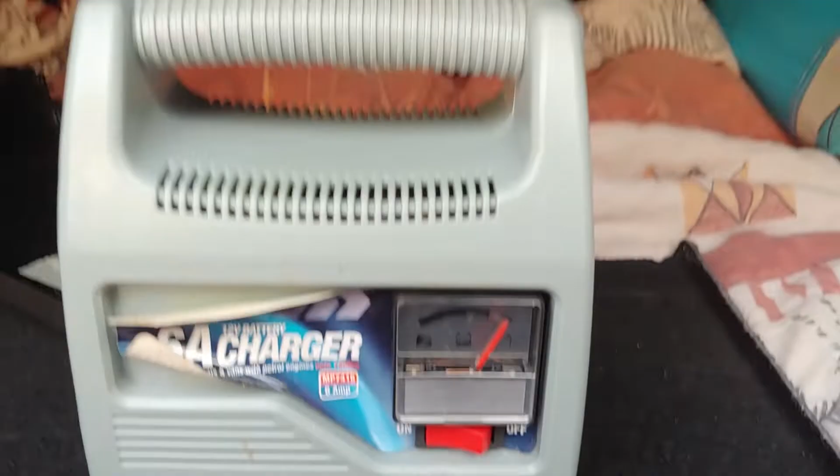Okay, connect my car to the charger. I recommend using this charger, despite it saying it's 6 amperes, it never gives you 6 amperes, probably 4 maximum, so it never overcharges your battery. I recommend using the cheap one, no smart chargers please, otherwise you can easily damage your electric system. This one is quite simple, it's just 4 diodes here and a transformer, which basically means the more your battery is charging, the less amperage is coming in, so I recommend using this one or similar.

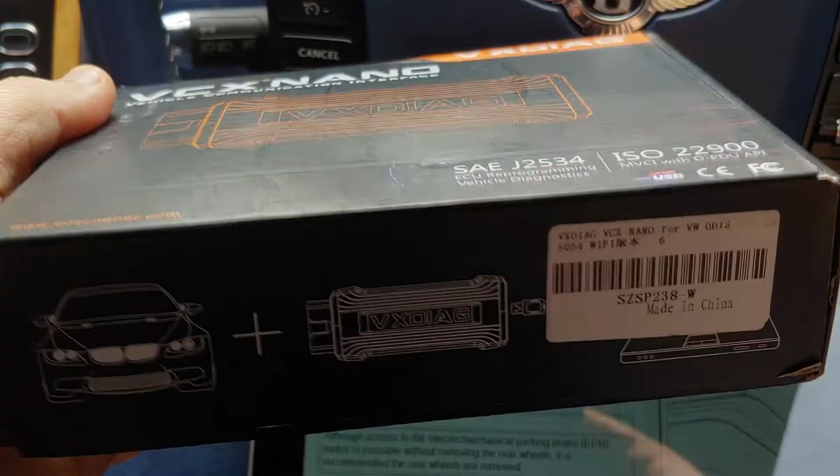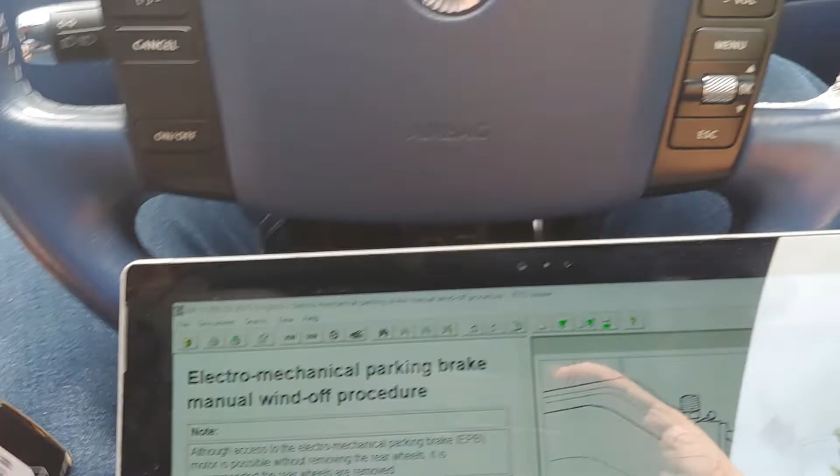Okay, this is my diagnostic tool I'm going to use. It's quite good, I use it quite often. It does everything from programming your car up to resetting all codes and doing any checkings necessary for Bentley, and not just Bentley, for all VW models. So I'm using this tool and a Windows based tablet PC.

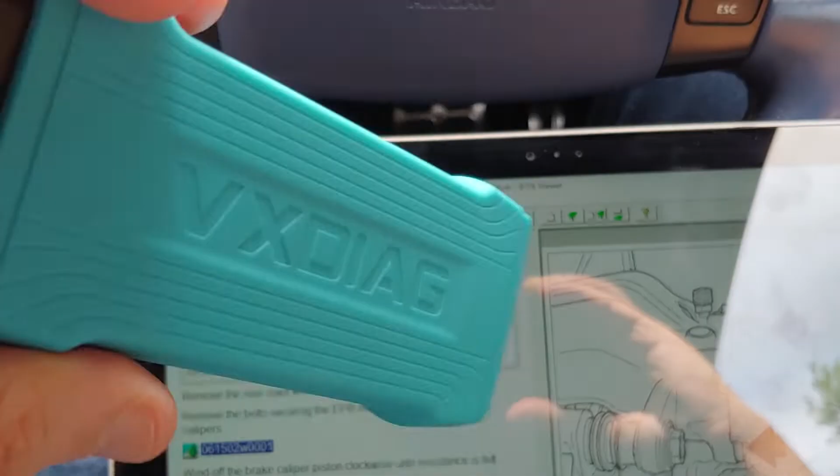This is how it looks like, the OBD port. I got the software that comes with this VXDiag tool installed already. I got my service manual DVD installed here as well.

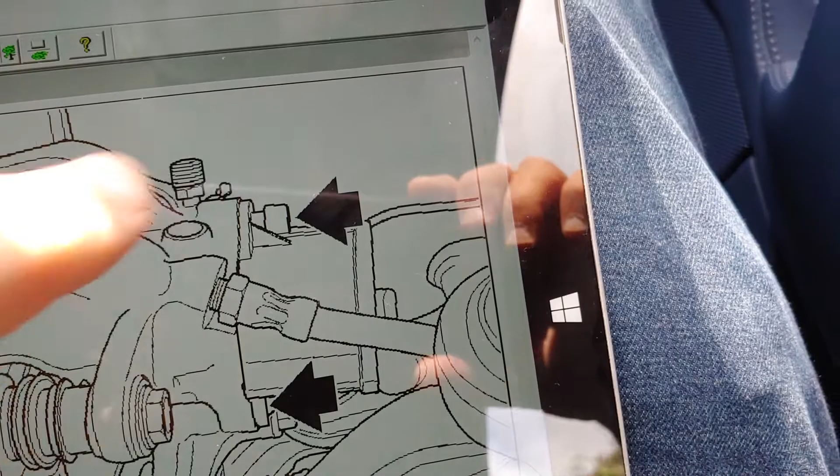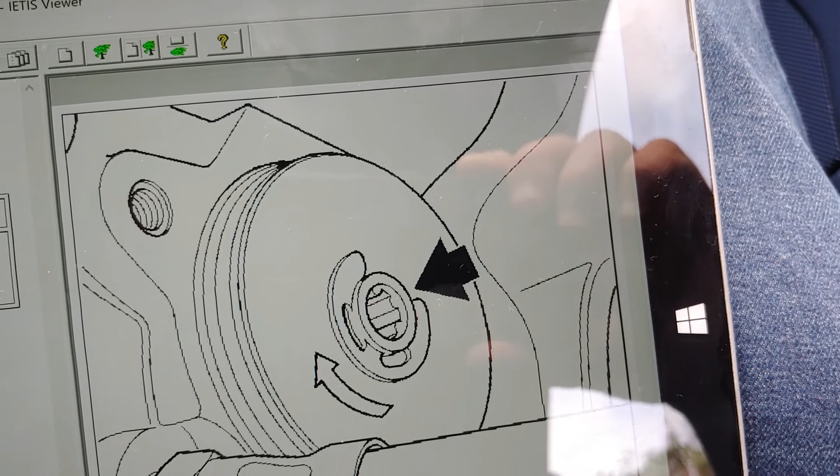So this is the fault. Just need to get rid of, unscrew these 2 bolts, and basically spin clockwise and the caliper up until we feel resistance. Then we can fit the new one, and after that we will need to do the calibration.

It's absolutely necessary to do that. Select, okay. We have to do this parking brake calibration in order for our electric parking brake system to work properly.

So we're gonna use this diagnostic tool to calibrate the new servo motor. Basically, I'm not gonna read it all, I'll put these screenshots on this video. You can do it yourself, or you can buy the DVD from the link below.

So yeah, let's just connect everything. Make sure we're not running the engine while we have a charger connected, otherwise we can damage our charger. So we're not running the engine, we do diagnostics first, and I'll show you what I'm gonna do next.

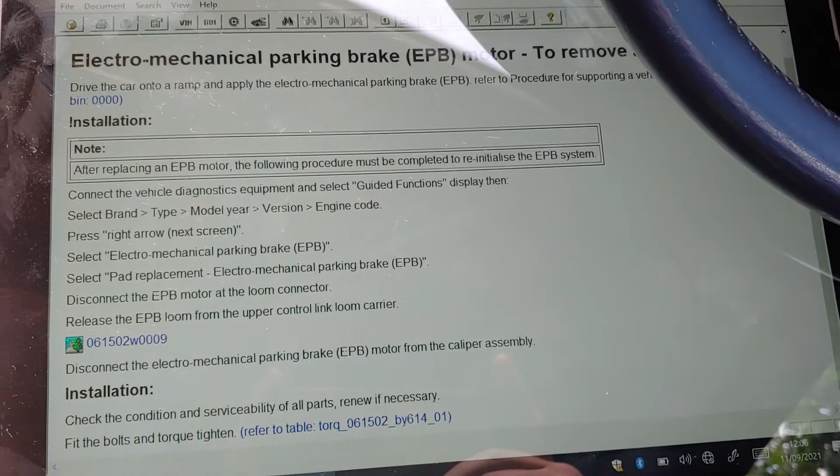Okay, once we have connected the tool, you can see blue and red lights flashing there. Gonna connect USB to the computer. I'm doing everything using one hand, so please forgive me for that. Something is not in the video, so I'm gonna connect that.

Okay, so we got it connected. Now, without applying the brakes, we don't want to start the car. We press the start button. Okay, our ignition is on, right? So I'm going to minimize this window. This is the software I'm using.

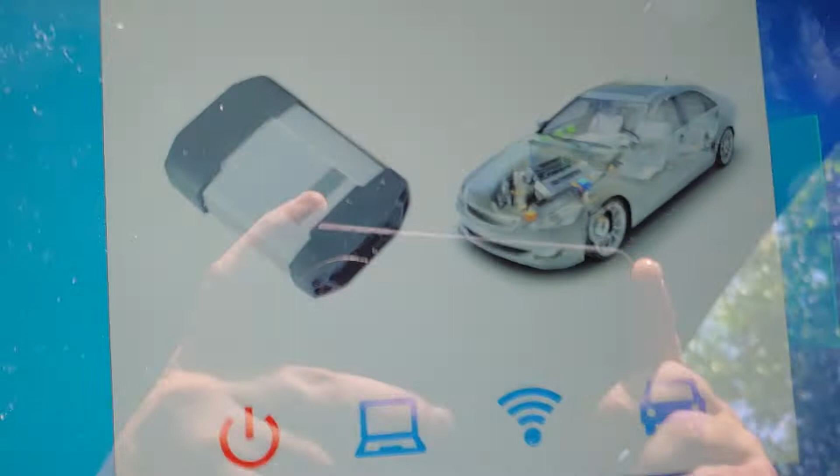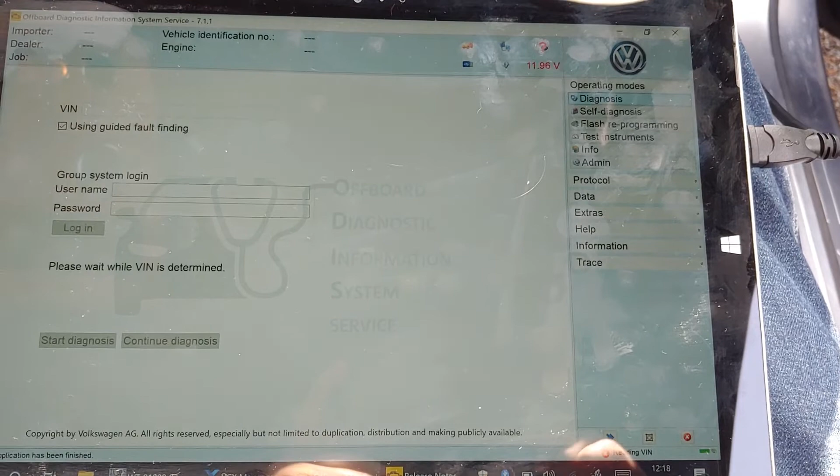It's called ODIS, and I'm gonna run it and pair it first. So let me pair it. Okay, it started. The software is reading my VIN number now. This is the status. See, it shows that we're connected. And let's wait until the VIN number comes in.

Okay, my VIN is detected. And we can start diagnostics by pressing this button. I'll come back to you once the diagnostics finish, because it takes a while.

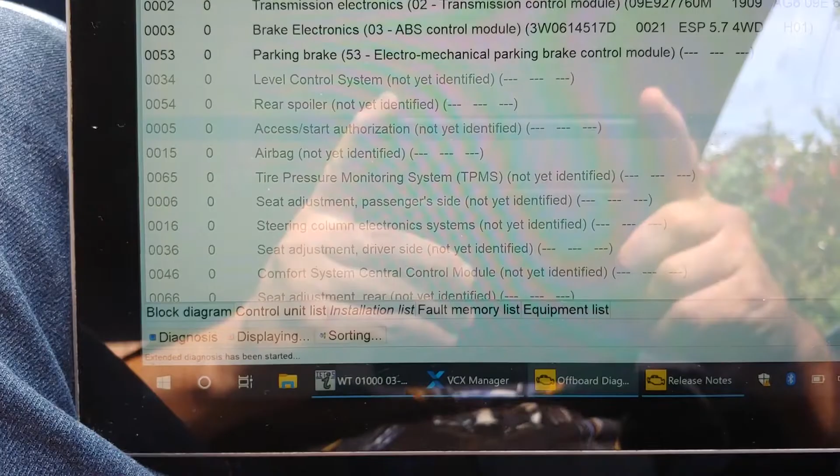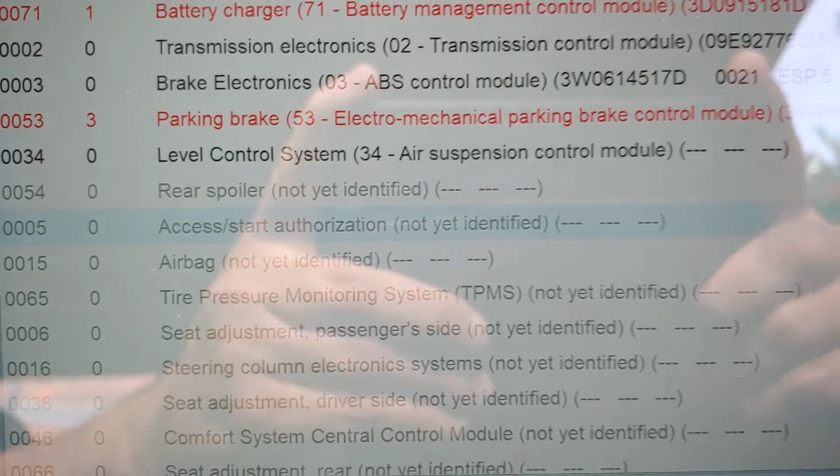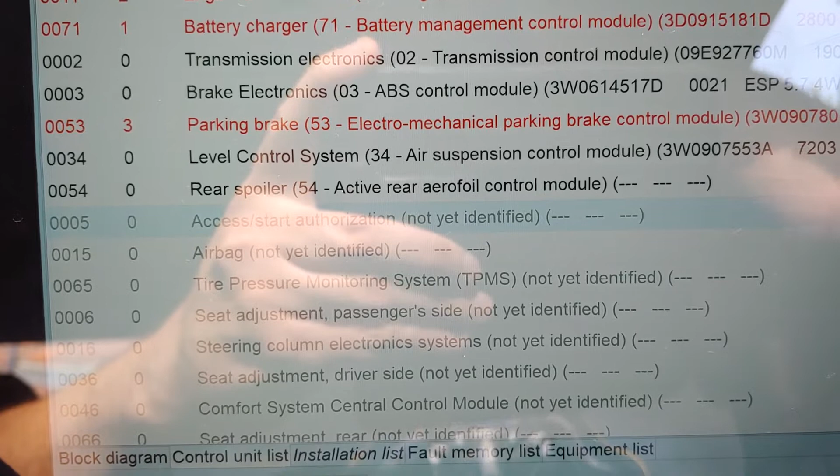This is what we're actually looking for: parking brake, mechanical parking brake control module. The other two are not valid for this car. It's just because we're on a lower battery at the moment, low battery charge, so they will go away on their own.

So let's wait until it finishes. Maybe we'll find something else and I'll come back to you.

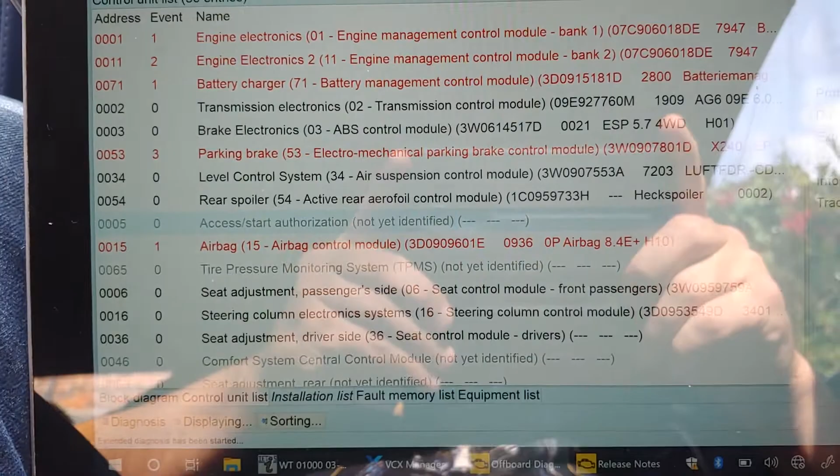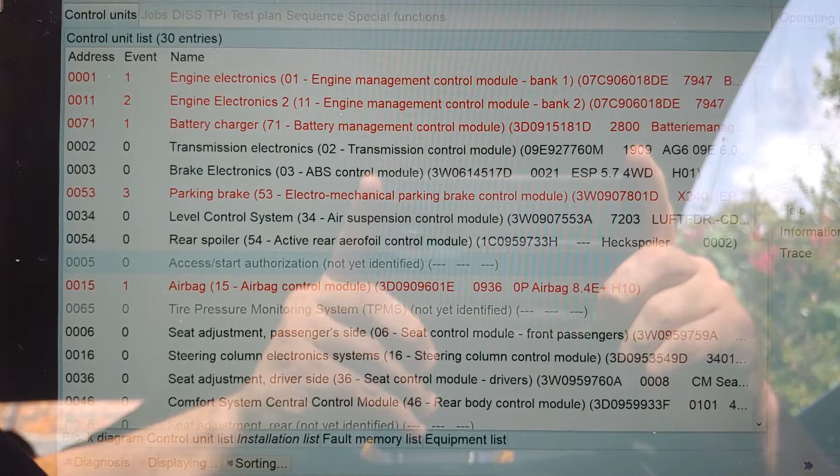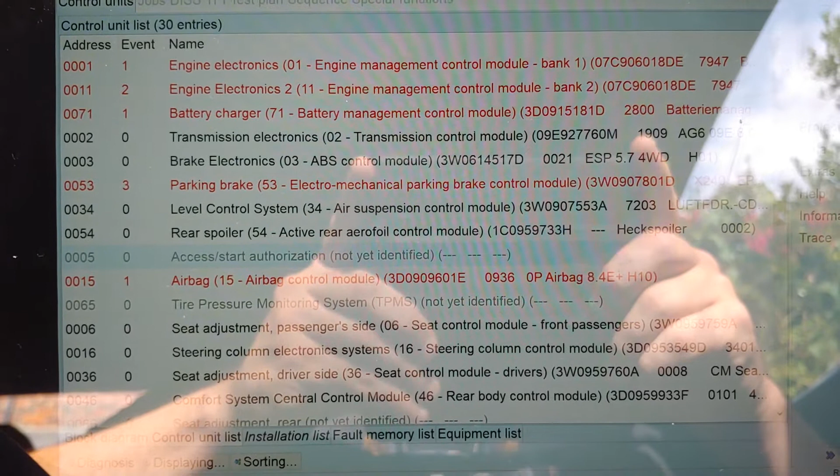While it's checking, one more thing I wanted to tell you: do not allow the car battery to drain below, I would say, 10.5, 11 volts. Otherwise all of these errors will come in, because this car doesn't have a sleep mode, and that's why it actually requires a big battery capacity. So make sure your battery is always charged, otherwise you'll have lots of issues with the car.

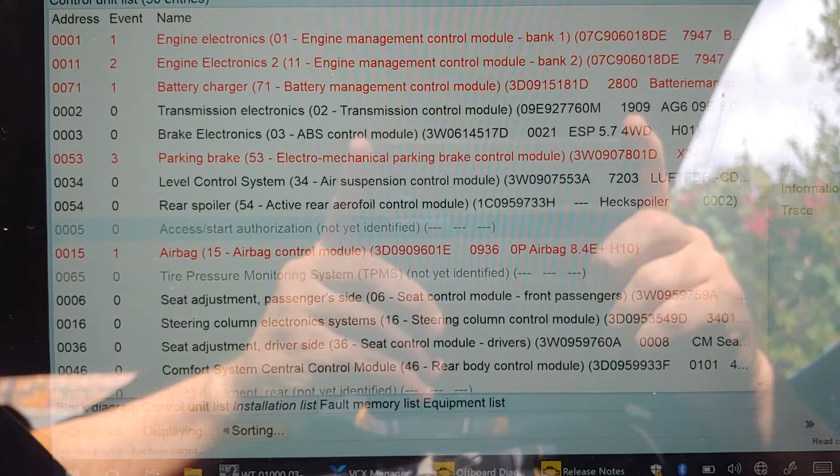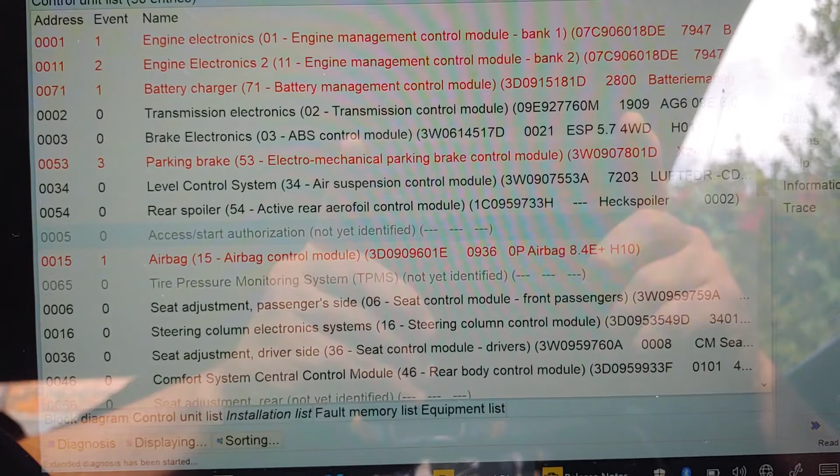I didn't drive it for a while, and as you can see, my battery is drained, and I can see that I'm experiencing these issues right now. It's not a big deal because I got the diagnostic tool, so once I charge it, I can simply reset them and they will not come in. However, if you don't have the diagnostic tool, you might need to go to your local dealer. They will do it for you for some additional charge.

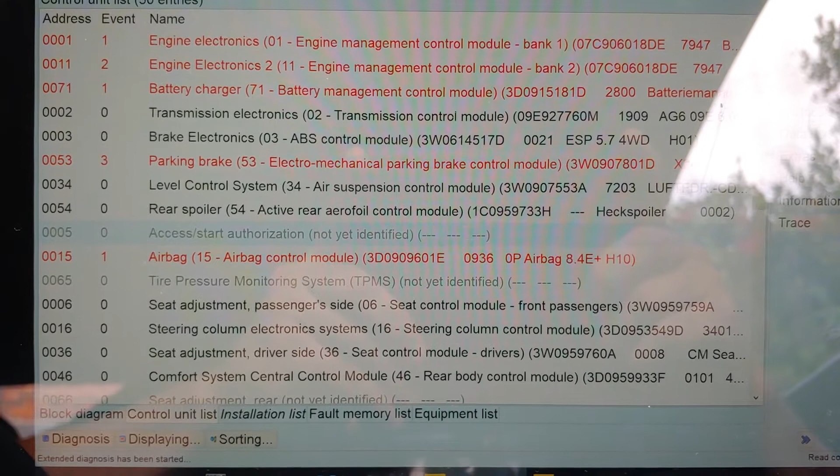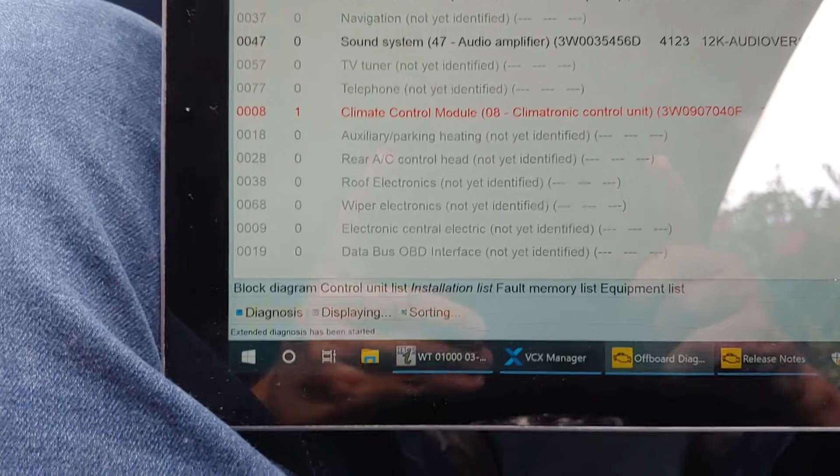Okay, is it finished? No, it's still doing something. See, too many reds. It's all because of the battery being drained.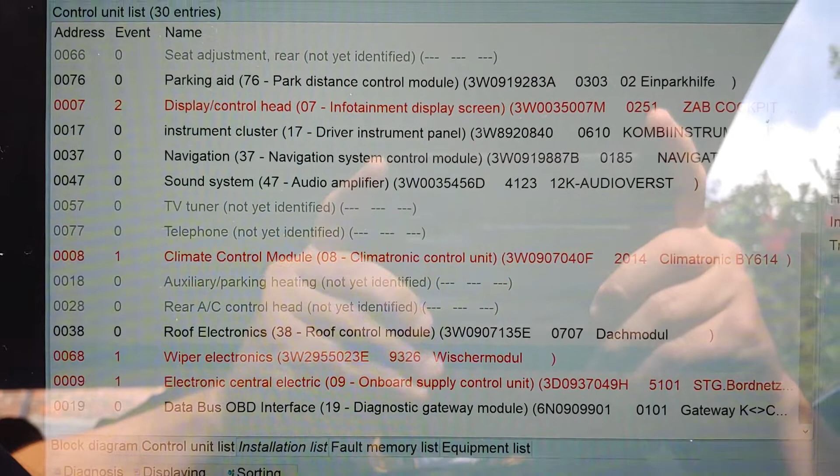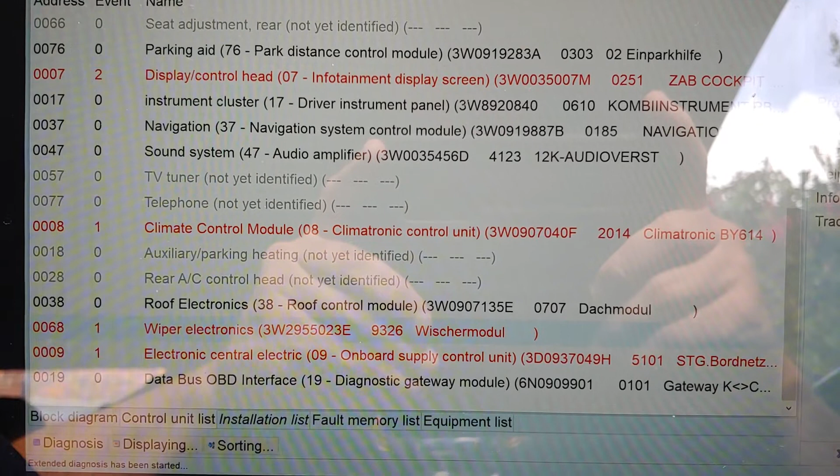If you drive it every day, you won't have these problems because your battery will always be topped up. But if you don't, make sure your car is connected to the charger, or check the battery from time to time. Make sure the charge level is over 12 volts.

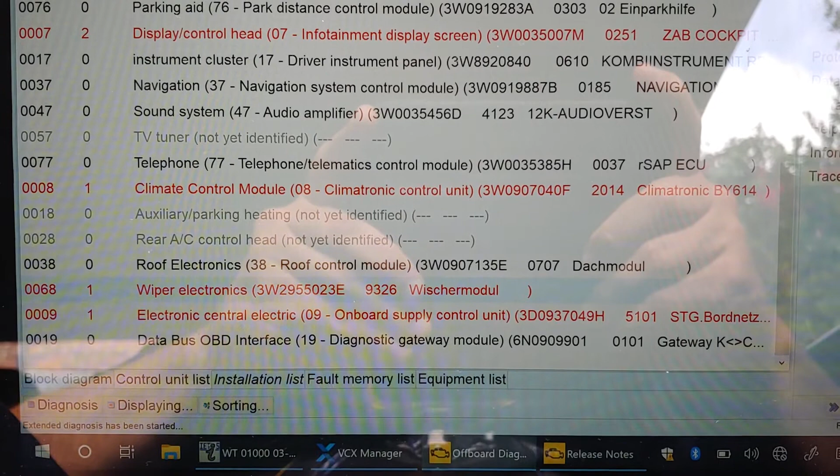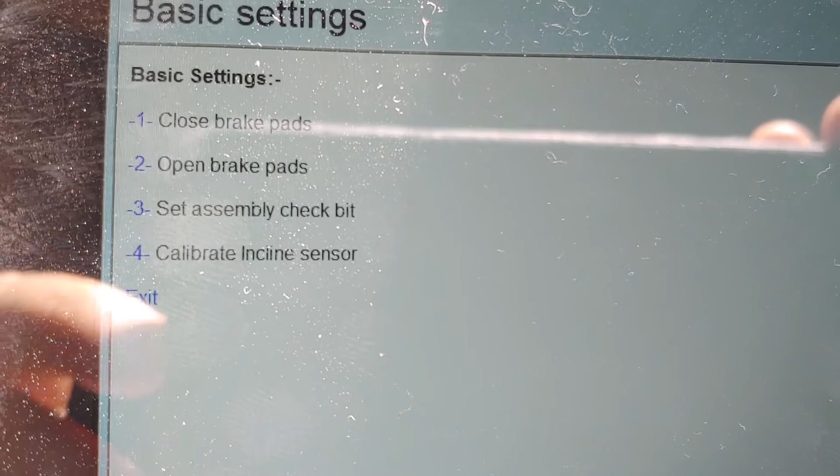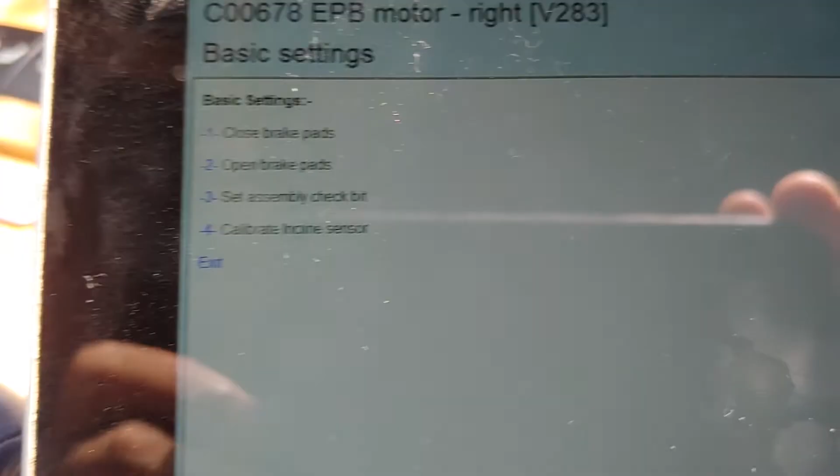Okay, currently my EPB motor right. I go to basic settings here: close brake pads, open brake pads, assembly, check out. Check bit, and calibrate incline sensor. Here we got 1, 2, 3, 4 and exit options.

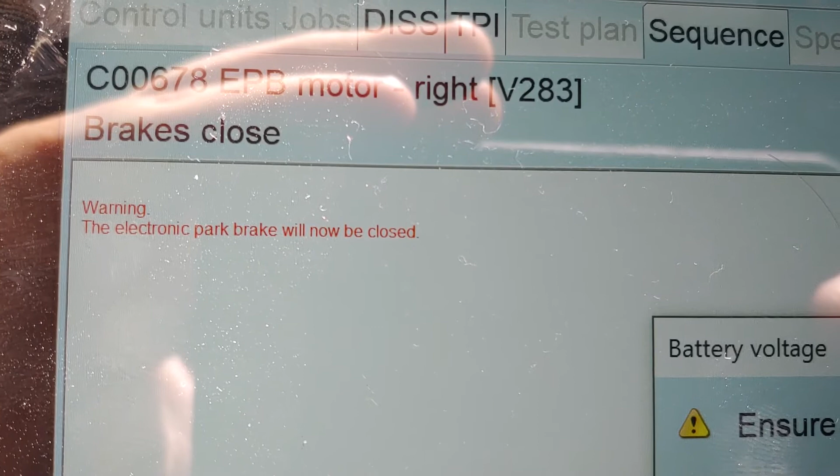So let's try to close brake pads. Let's do it one by one. It gives us a warning, so the electronic park brake will now be closed. And I didn't hear anything. It seems like the motor is broken. But what we need to do is put the brakes in the service replacement position after we replace the motor.

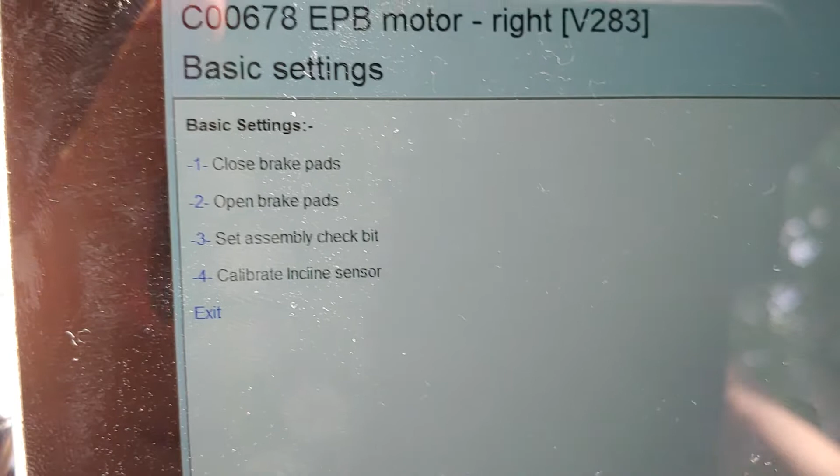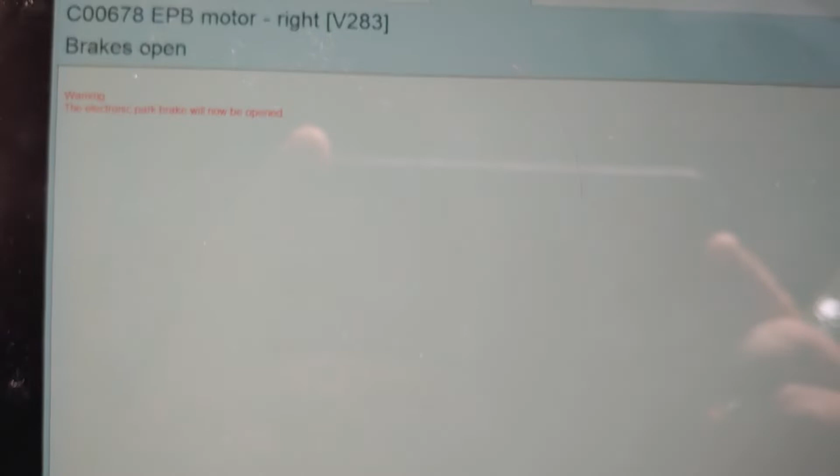Let me do all the other tests quickly, and we will start replacing the part. You can hear it, and we probably want to continue.

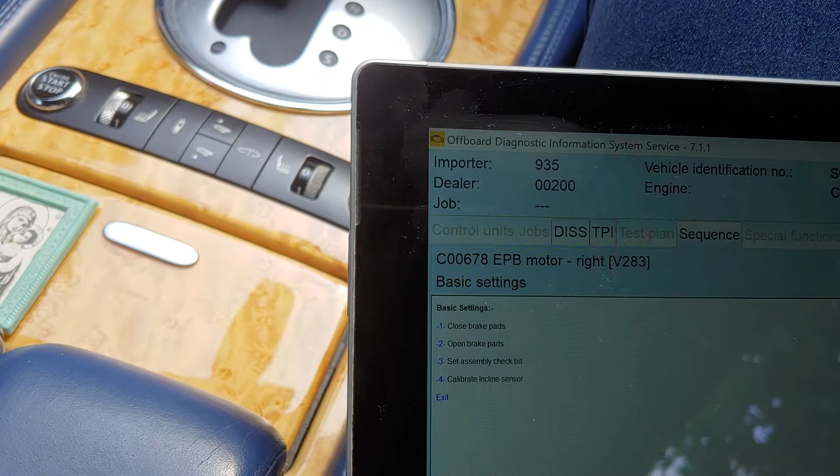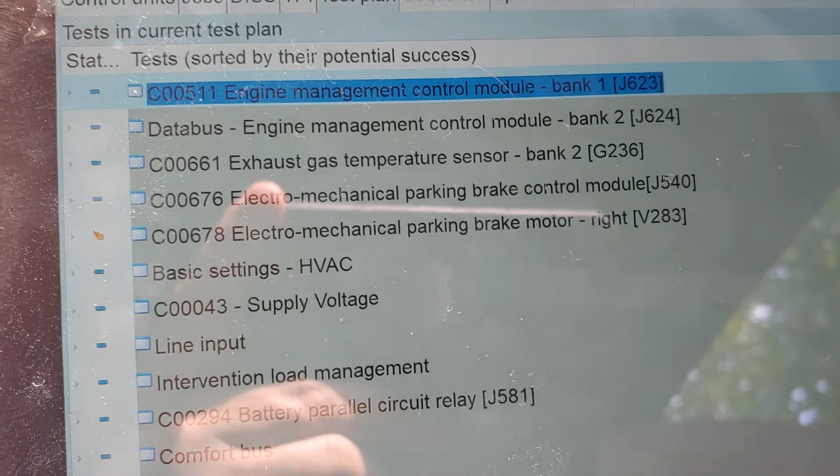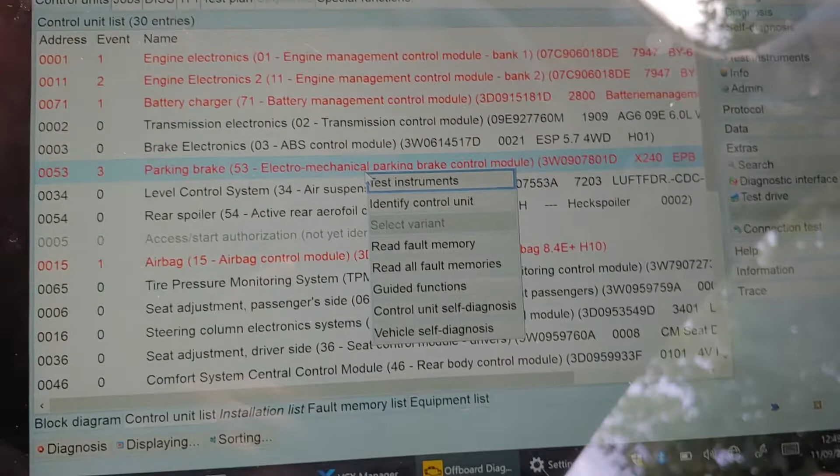Let's cancel this test. Yes, so pretty much it's now closed. The car can't move, and in order to unblock it, I'm going to replace that motor. What we're going to do now is reset the error first, because we don't need it. We know this is not a working part. We know what the issue is.

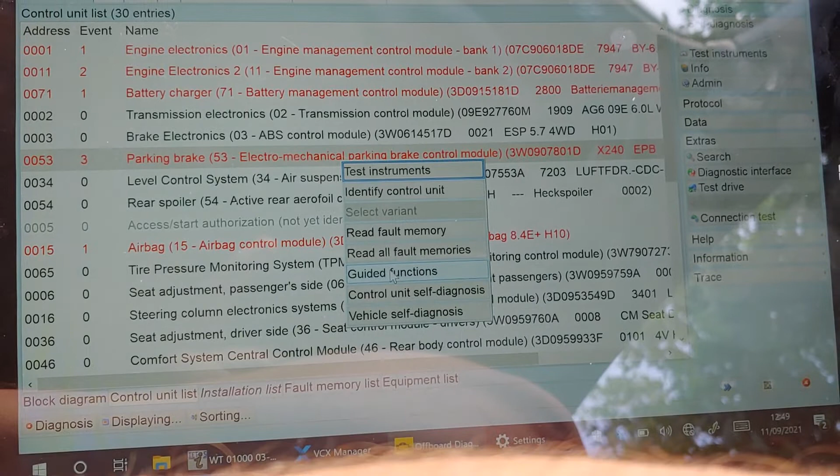So I'm going to - sorry, it's not very comfortable filming with one hand - read fault memory. Continue.

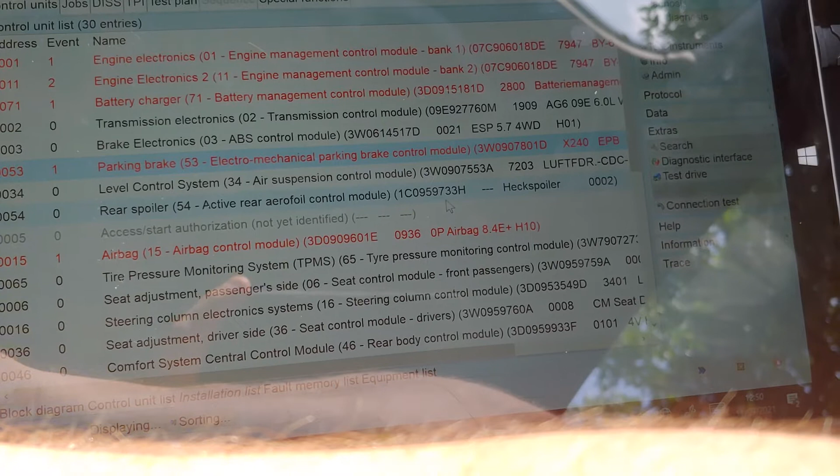This is the menu for replacement of brake pads in Audi software. I'll show you once again. Cancel. So you have to be in the fault memory tab, then press right click and select guided functions. Guided function, click the guided functions. All of the functions come here. See, we have pad replacement.

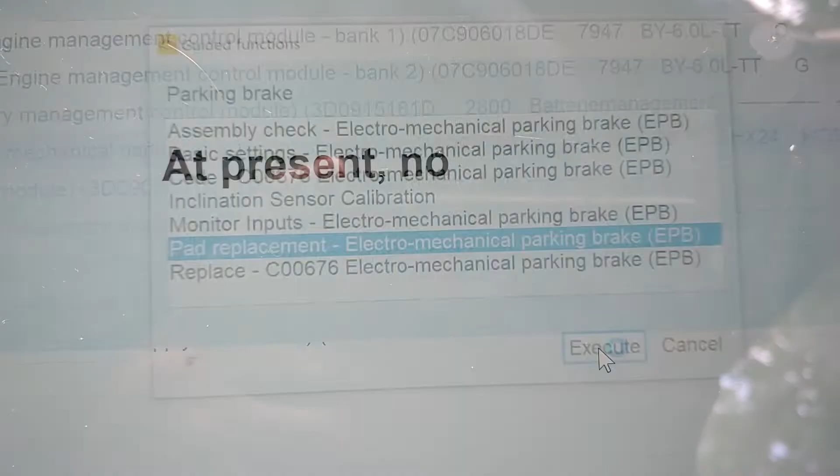This is what we're gonna do once we replace our motor. We just click to execute here, and it must be again this noise, I believe, because the motor is not working.

What does it say? Pads is now in full open, and pad can be removed. Sorry. Open state, pad for removed. Press done button to continue. Done.

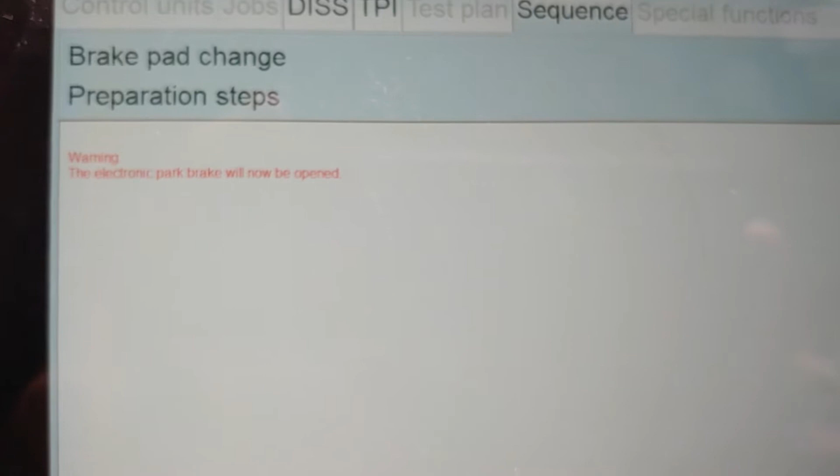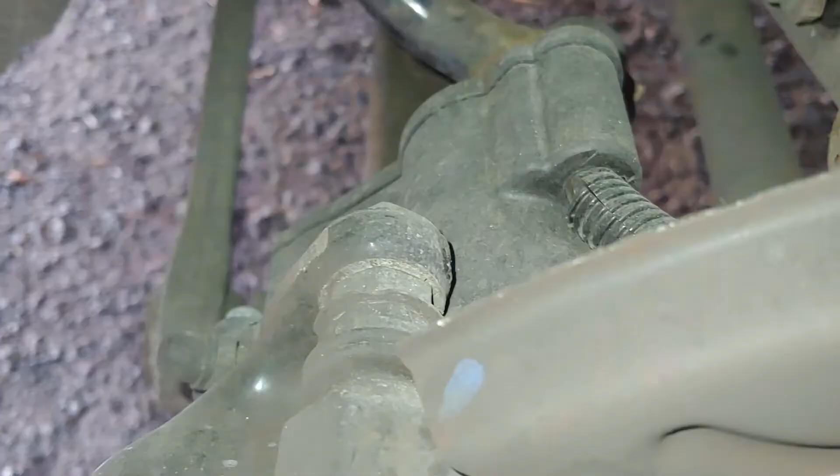Okay, now we're in the jack mode, and let's start replacing the part. This is where it fits. So we have screwed this bolt, and the other one is below somewhere. Yeah, and that one. And take this clip off, and pretty much that's the procedure.

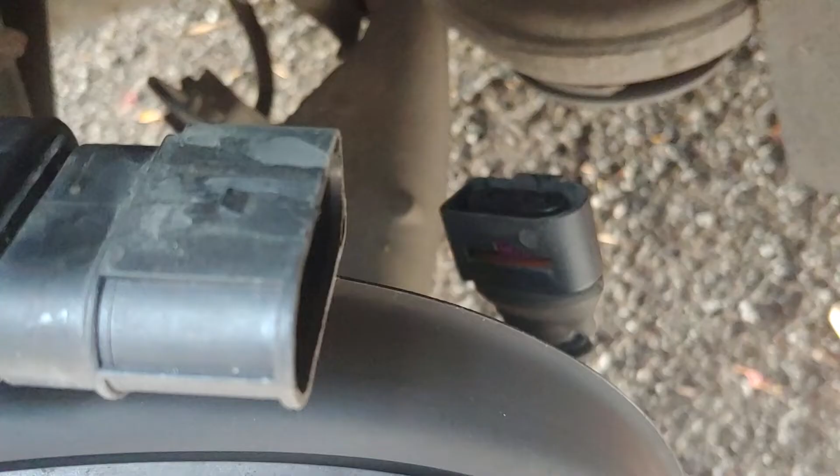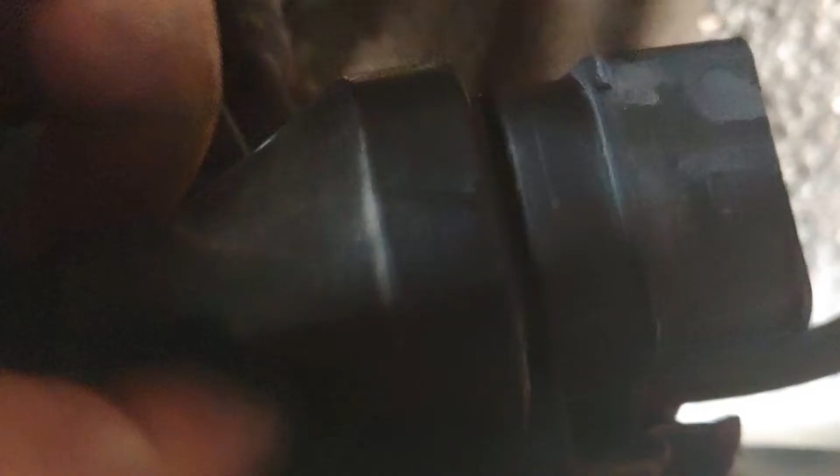I didn't show you how I removed the wheel. I think you guys can all do that. This one takes off quite not easy. It fits here like that, so make sure you move it this way first, push it, and then disconnect. It will be much easier. So let's just remove the motor.

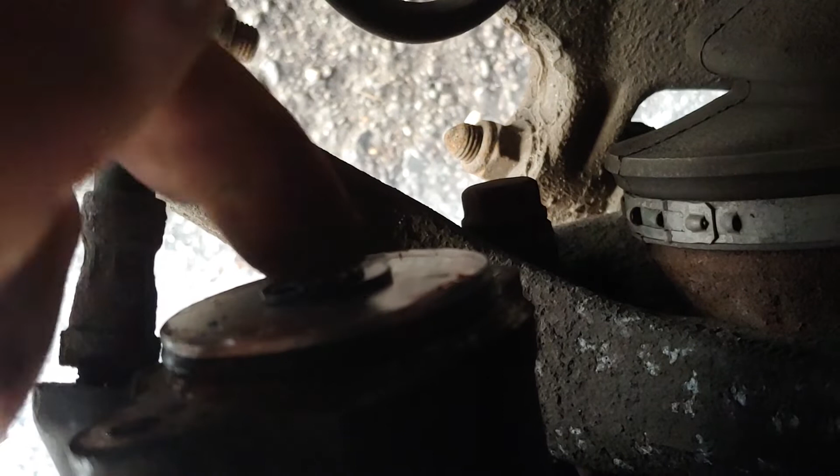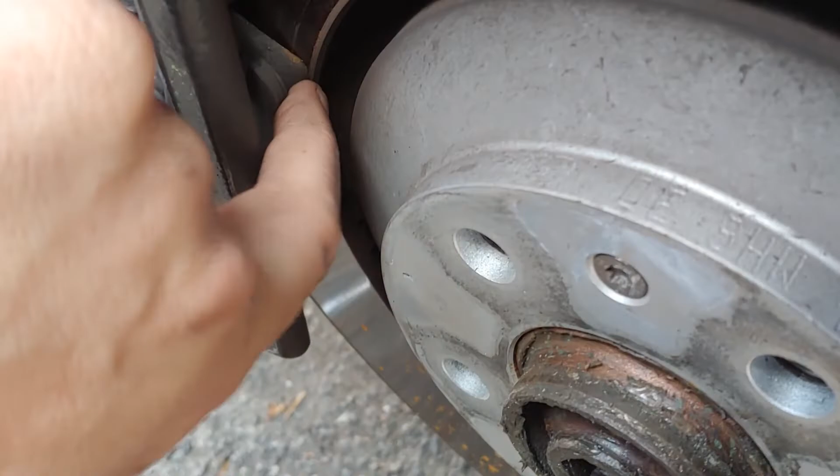Here is my motor. Not entirely sure what's wrong with this. I'll just compare with the one I bought and see what's going on. This is what we can see from behind. We need to screw this clockwise, following the manual, until we feel resistance. I'll make sure it's already in that position, because I think when it's locked, the brake pad's locked right now, so I think it's already in the proper position, but I'll double check that.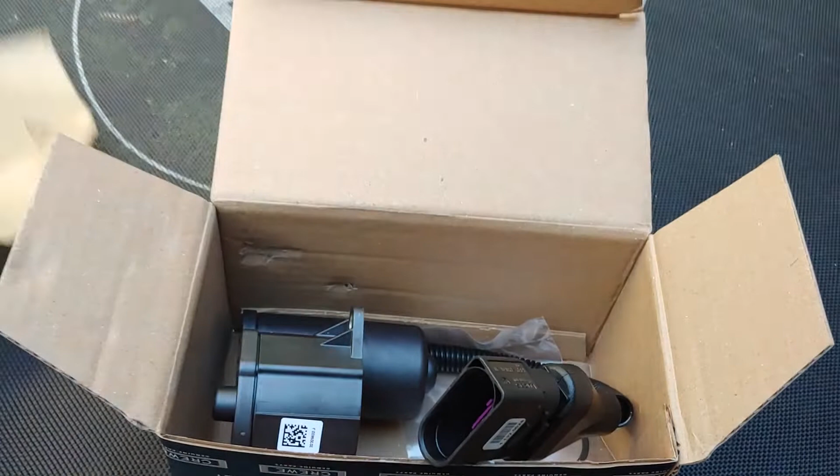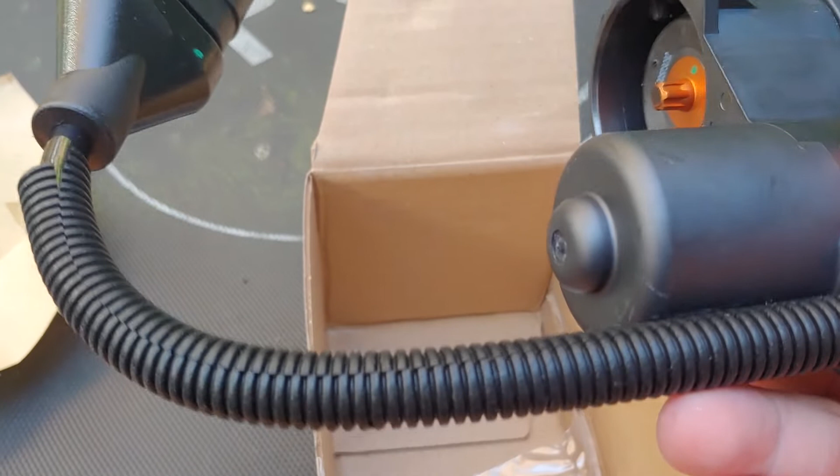Here's our part, brand new, genuine. Some people say aftermarket parts work, according to the internet, but I prefer to use genuine ones. Here's the part number. So let's just put this one in place and see if it fixes our issue.

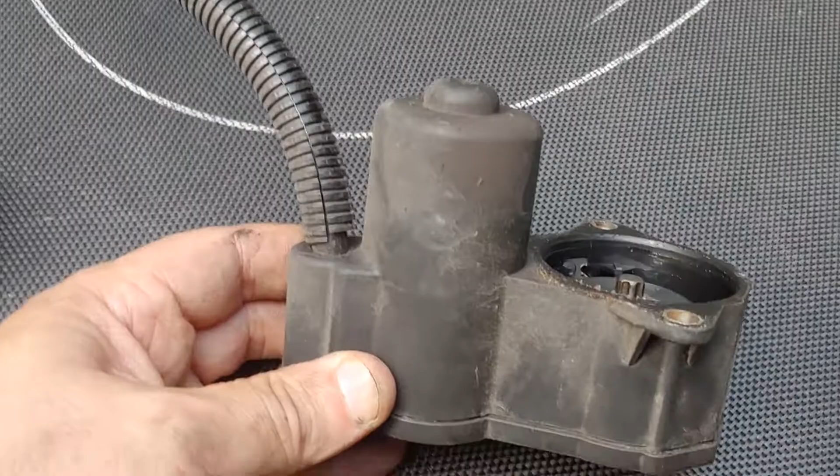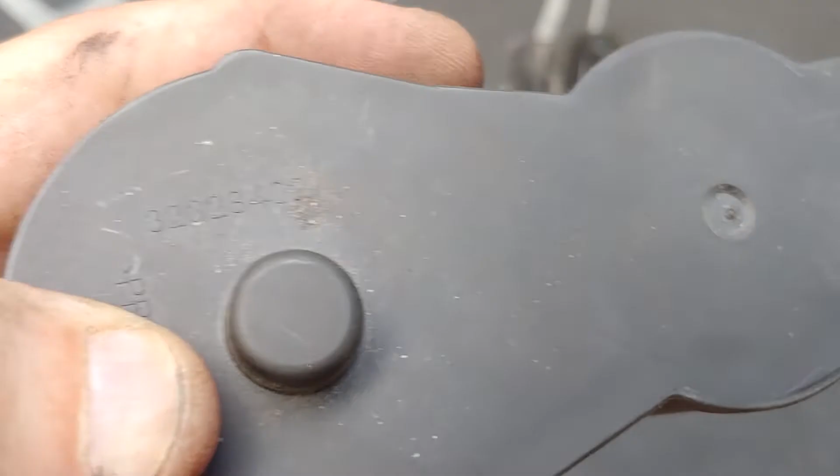The part is genuine. Let's check what I had previously. So the previous part doesn't look like it's actually been a genuine one. I think it's some aftermarket part, because it doesn't have a proper number - it doesn't make sense what's the manufacturer and what's the part. As you can see, this one is copper, and this one is not. It's actually lifting slightly. I think something's wrong with this inside.

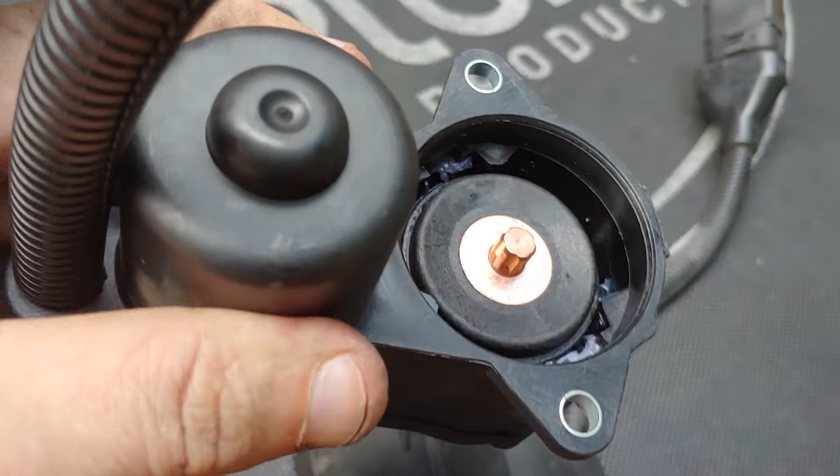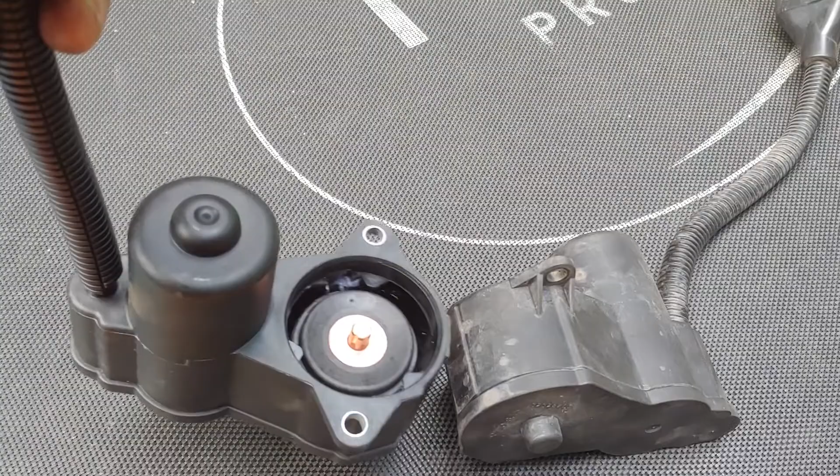Let's replace it and see what happens later. I'm gonna fit this one in position, and I'll come back to you once I've done that, and we'll come back to the computer calibration work. Here, this is our new part. Fits like that. That's in place.

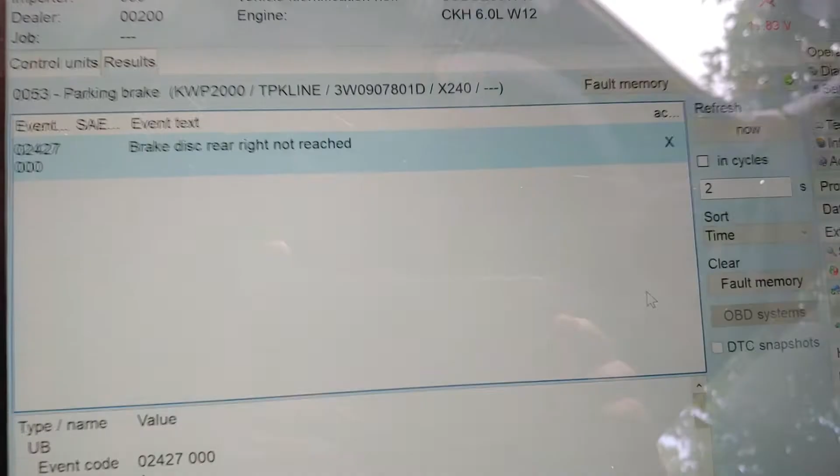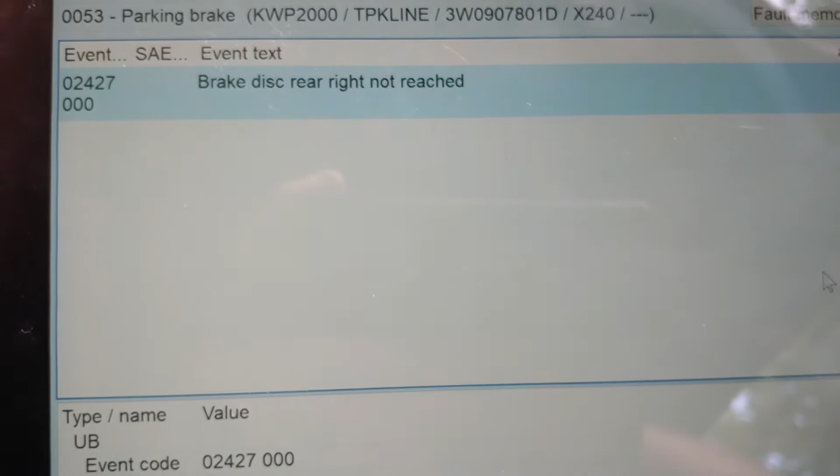Let's try to synchronize them. Now we need to synchronize everything, otherwise it's not going to work properly, using our diagnostic tool. In order to clear the fault codes, we need to switch to the self-diagnostic menu, the self-diagnostic, and we will see the same error. You need to double click on that error and you will see this menu: fault memory, clear fault memory. What we're gonna do now is clear this fault memory. Yes, and wait a little bit until it clears.

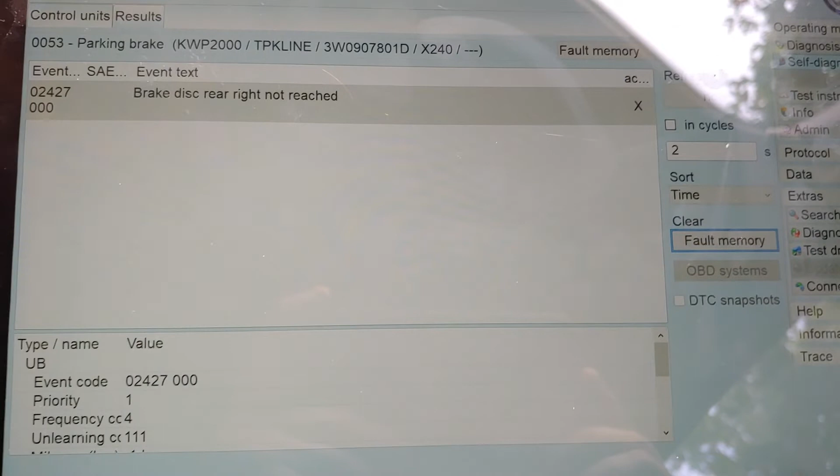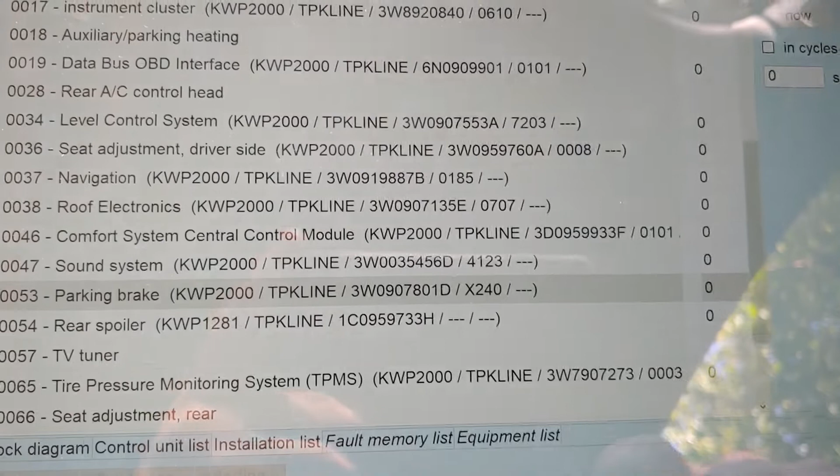When there is no error, you need to go back to the previous menu I showed you and repeat the procedure from 1 to 4. I've already done it, so you just need to fully open the brake pads, fully close it, repeat it 3 times, and then follow the step-by-step instructions from the application. As you can see, everything is fixed now and working fine.